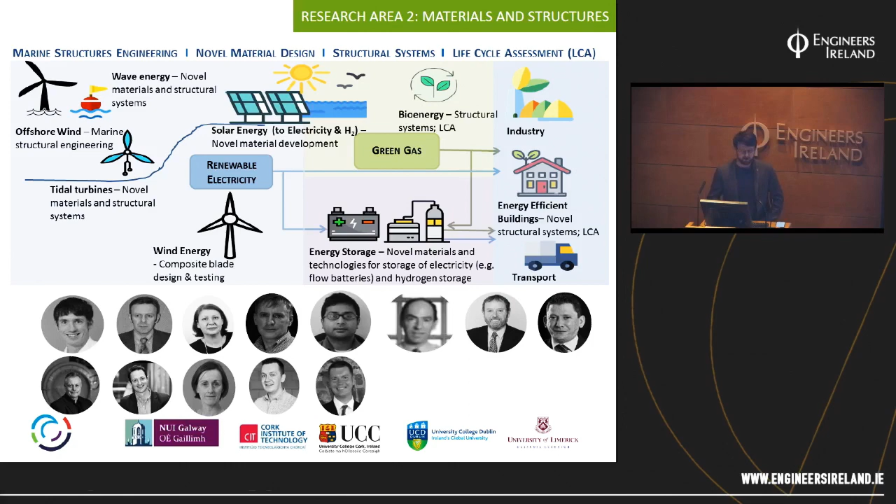Starting off with the energy generation side of things, but as the centre is developing, we're moving into topics that are closer and closer to the societal level and the actual application of energy throughout the full system. A lot of the research is collaborative across all the different institutions in Ireland.

I have a number of case studies here to talk through. The first one is some material characterization work done between NUI Galway and UCD, looking at how we can improve the mechanical performance and cost effectiveness of materials for applications that really haven't been tested before. Tidal turbines are devices that have to operate for up to 20 years with limited opportunity for maintenance in really harsh conditions.

These turbines operate 20, 30 or 40 meters down on the seafloor. You've got high pressures, and water ingress into the composite material is something that can happen and have a really negative effect on the structural performance. Some of the material characterization work done at NUIG involved developing a pressure pot where they artificially aged the composite material, put it in seawater at high pressure, and watched the voids or small holes in the composite material fill up with seawater.

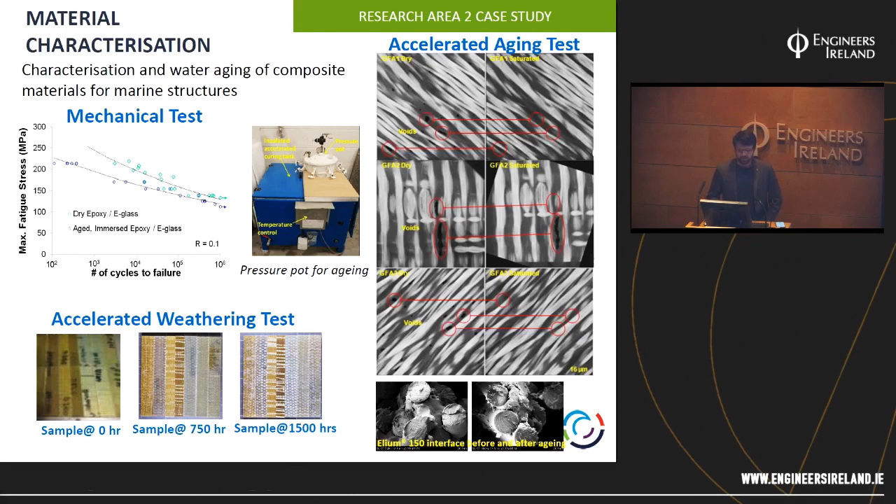They then did accelerated aging tests, including fatigue testing, to see how the material performed when simulated to have experienced 10, 15, 20 years of operation underwater.

As well as this, the part of the centre in UCD is looking at different types of materials, such as 3D printing and fiber reinforced composites for use in new applications such as tidal turbines. The example shown here is additive manufacturing as part of the SFI I-FORM Centre, led by Professor Denis Dowling in UCD, which involves 3D printing of fiber reinforced composites under different manufacturing conditions.

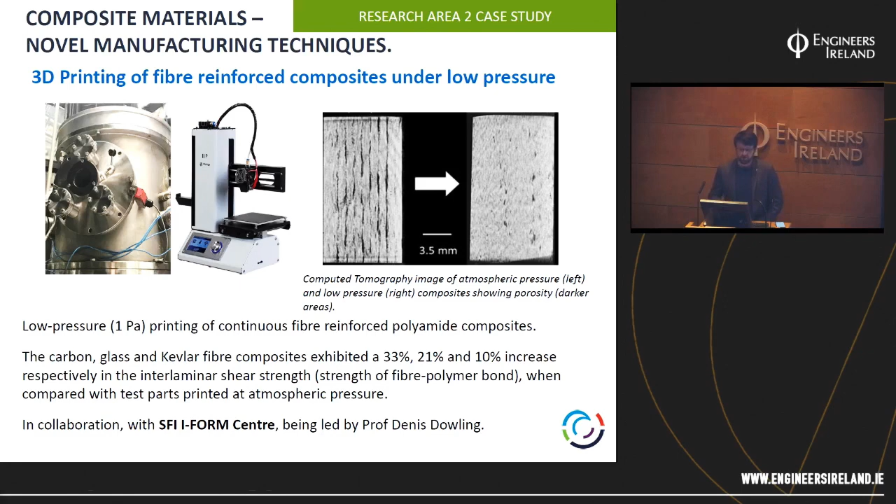The top right picture shows the difference in the quality of the composite at atmospheric pressure as well as under low pressure conditions. You can see there are much fewer voids between the layers of the composite, and therefore much better mechanical performance. This core materials-level research underpins some of the structural design and structural testing research that I was part of at NUI Galway.

Taking in the characterization of different composite materials, looking at coatings such as hydrophobic coatings for reducing the adhesion of water and therefore the erosion on surfaces, and the surface treatment work at UCD. It's all pulled together into coupon testing to look at how those materials behave mechanically, and then that feeds into our development of design and analysis software at the university.

I'll talk a little bit more about BladeComp and the development of the software in a little bit, but for now I'd like to talk about the large structures test cell that we have at the university.

This is a full-scale structural testing facility. We have a modular steel frame attached to, I think, a 10 by 4 meter or 10 by 6 meter reinforced concrete strong floor. So it's a modular setup.

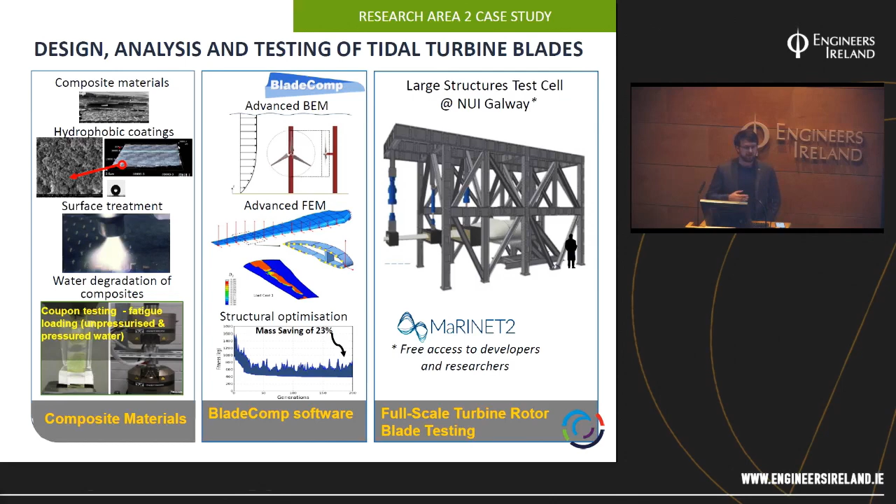We can change it around for the different types of tests or the different types of blades that we're testing. What we have here is a blade, 9 meters long, for a tidal turbine. So we have 3 hydraulic actuators attached to a hydraulic ring main, and they can go up to 750 kilonewtons of force. So we do structural, static, and fatigue testing of different blades.

On the design analysis side of things, as part of the research that we do and the services that we offer, we also do finite element analysis, assessments of the design of the structure, and analyze the model and the actual test setups as well.

Coming off the back of that and a couple of different research projects, we developed this automated design methodology. It takes in all the different input variables when you're looking at a blade - the geometry, the materials, the way the composite materials are laid up in a blade - and automatically generates these finite element models for different types of analysis.

What we do then is take those models, and the software can output the optimum design for manufacture. Working with ÉireComposites, a composites manufacturer based in Galway, we designed and built blades for 15 kilowatt wind turbines, just to test the whole methodology.

These were tested in the lab - you can kind of see it, it's a little bit small on the right. We did some mechanical testing of the blades to verify that the whole methodology and the software output accurate results. And we've done other physical testing, showing modeling and testing of 13 meter wind turbine blades as well.

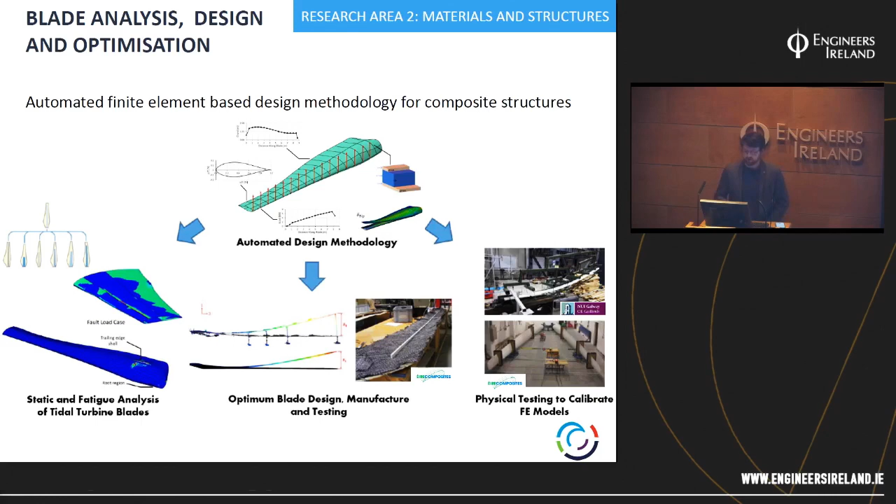One of the culminating points of this research was then a project, a Horizon 2020 funded project called FloTEC. That was working with Orbital Marine Power, a Scottish tidal turbine developer. They're building right now a 2 megawatt system.

You can see it at the top right. It's a floating structure with two 16 meter diameter rotors supported on it.

We used the BladeComp software to optimize the blade design for a number of different objectives. We were looking at making a lightweight, high performance, and cost effective to manufacture blade. Using genetic algorithms, we were able to generate thousands of different blade designs from the software, assess them all against one another, and come up with the best design to be manufactured.

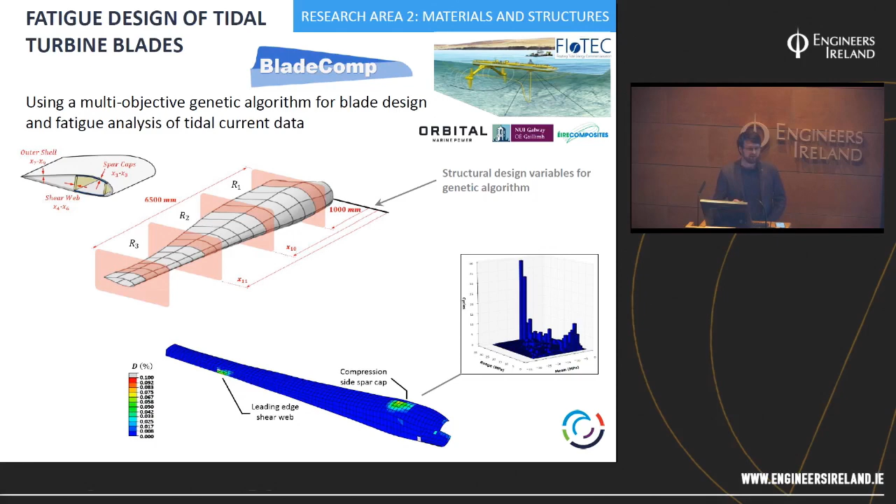So that project is ongoing. The blade is being manufactured at ÉireComposites right now, and I think testing is due to start in about June of this year. This gives us a bit of an overview of the technology development programs in tidal energy since 2011 and the inception of the lab at NUIG.

Initially, we worked with Marine Current Turbines. They were a Siemens-owned business at the time, but are now owned by Atlantis, or Simec Atlantis, in the UK. We developed a test specification for 8-meter long blades and acquired some of the hydraulic actuators for the initial testing.

Following up from that, we worked with Open Hydro to test blades for their turbine - I think they were half-scale blades. That led into projects with Orbital Marine Power that I've discussed, and ÉireComposites to test blades up to 13 meters in length. And in parallel with all this was the development of the design software.

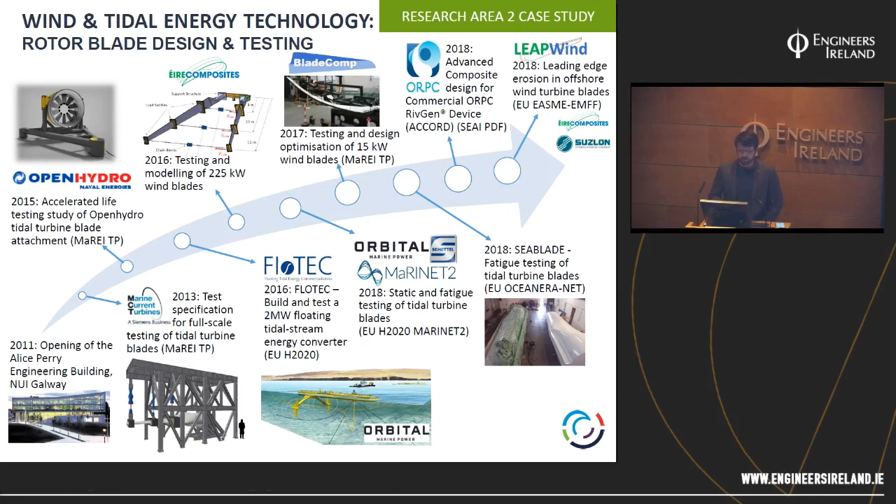James will talk about it in more detail, but we've also had projects working with ORPC to test blades for their turbine, continuing developments into wind energy, working with ÉireComposites and Suzlon, an Indian company that's the biggest wind turbine manufacturer in India.

We're looking at testing blades with leading edge erosion resistant structures as part of another project. So that's a summary of the work going on in NUIG. As part of the MaREI Centre, we don't just look at the initial design side.

We also look at operation and maintenance related research. One group, led by Vikram Pakrashi in UCD, has taken through the low to mid-level TRLs technology for underwater image processing of underwater steel structures. It's a system that takes images of different steel substructures and analyzes the levels of biofouling, which can increase the hydrodynamic drag on a structure. The system can define which types of biofouling are on a substructure and input them into finite element models to output the resultant drag, allowing analysis of the overall impact on structural lifetime.

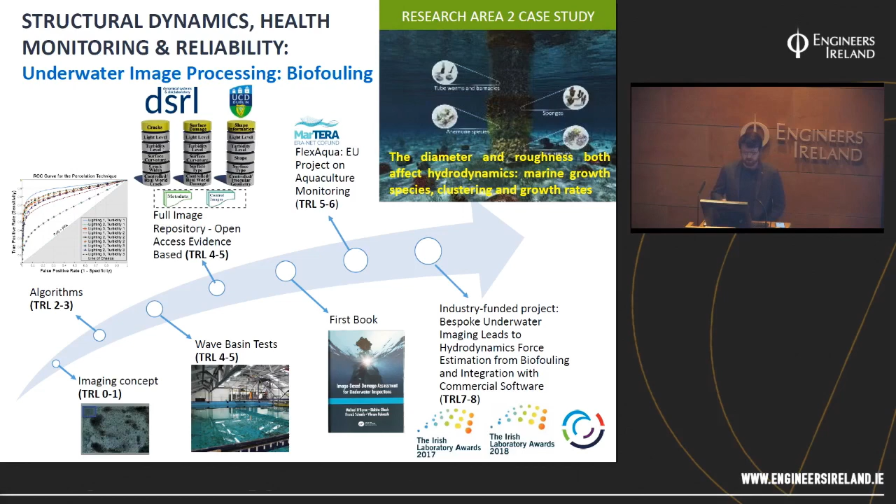That's an overview of the MaREI Centre side of the research. One thing that was a big player in the research ongoing at NUIG over the last couple of years is the MaRINET2 program, which is a Horizon 2020 funded research project.

It's based out of UCC, and the whole goal is the standardization of all the different testing requirements for ocean renewable energy devices. It also provides access to all the knowledge being generated in ocean renewable energy research, and provides access to different companies to cross borders within Europe and avail of testing not available in their home countries.

The transnational access part of the program allows energy developers or device developers to use facilities in another country to test their devices free of charge, supporting the industry. There are also work packages around developing an e-infrastructure for knowledge sharing and providing training to support the blue economy and create a highly trained workforce for this nascent industry.

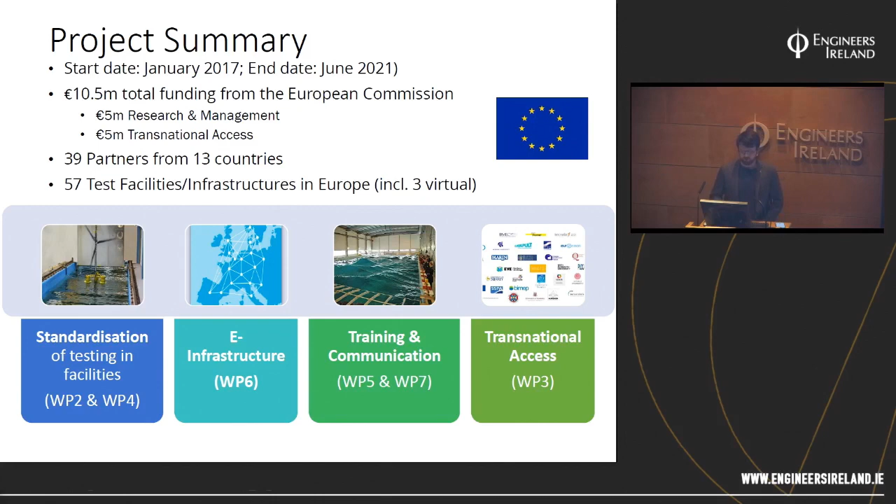The project started in 2017 and runs until 2021. This is the second MaRINET2 program, with 10.5 million total funding, 5 million of which goes towards transnational access, paying for companies to use test facilities around Europe. There are nearly 40 different companies participating from 13 different countries, organized into 7 work packages covering standardization, e-infrastructure, training, communication, and transnational access.

The team includes Michael O'Shea, who unfortunately couldn't be here today so passed his slides over to me, along with Jimmy Murphy and Emma Knowles, all based out of UCC. Some of the partners are listed here: EMEC, based out of Northern Scotland in Orkney, DTU in Denmark, and IFREMER, who we've worked closely with at NUIG on research programs.

Transnational access works through 5 different calls over the 3 years of the program. In the first call, a good chunk of the money was paid out, 1.26 million, followed by similar amounts in following calls, so there's still money left in the pot. If anyone here is a device developer or has contacts, they're welcome to put in a relatively short proposal for the 5th call coming up later this year. There will be information as part of a webinar and FAQs on the application process, and every institution has an infrastructure manager who can walk you through it.

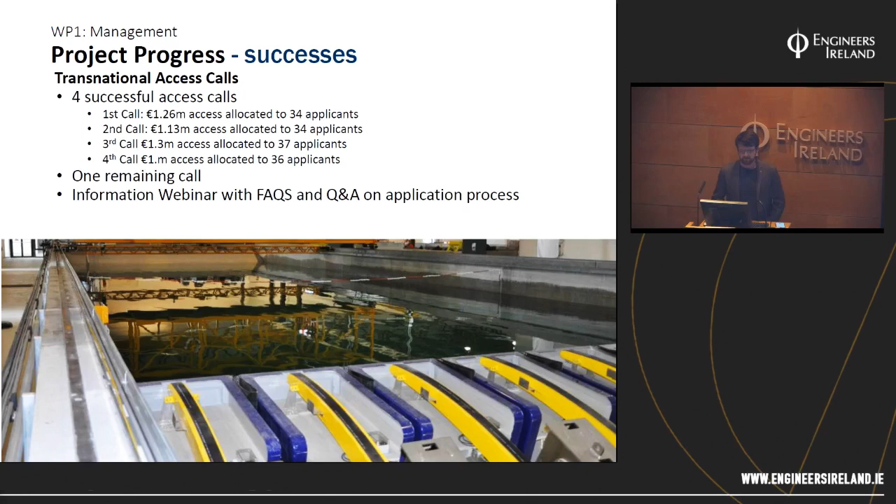Some statistics for Ireland so far are really quite good compared to other participants. Nearly all applications to Irish institutions have passed, mostly on the first call with some on succeeding calls, with a total of over 300,000 in funding that's gone towards Irish developers and researchers over the first 3 calls.

There's also a research project coordinated by UCC called the Tidal Turbine Roundrobin, which aims to standardize all the different test facilities, the wave flumes or flow tanks, across 5 different countries and 5 different test infrastructures.

One tidal turbine has been developed, about 1/10 scale, roughly a 2-meter diameter, and it's being tested at each of the institutions. Up to June 2019, the turbine was tested in France, Scotland, and another country where CNR is based, and it's soon to be tested at Strathclyde and Queens. The results will be published as a comparison to help develop a testing standard for these devices.

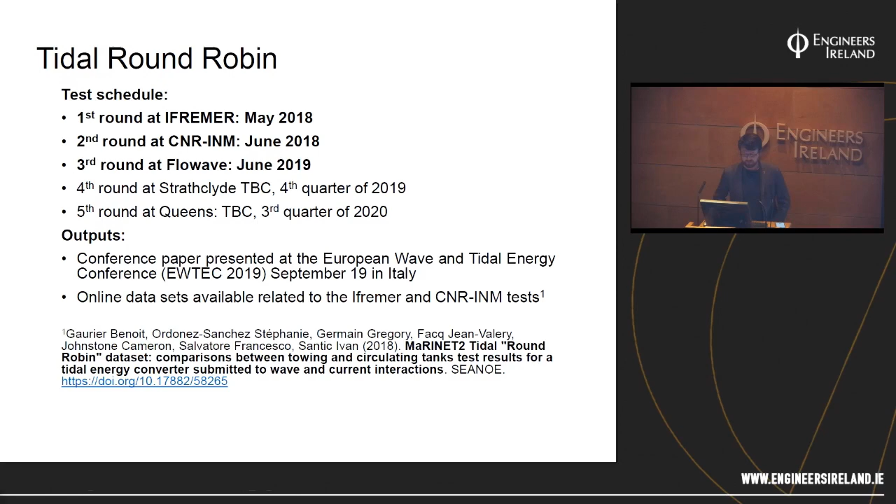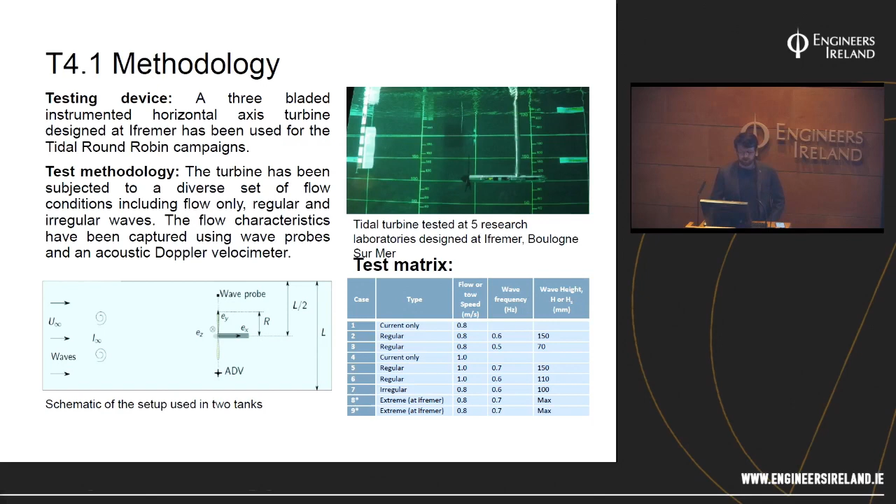The methodology involves a 3-bladed horizontal axis tidal turbine. The test setup shown is at IFREMER in Boulogne-sur-Mer, France, where it's subjected to a number of different flow conditions representative of regular and irregular waves, using the same acoustic Doppler velocimetry instrumentation to monitor the device across all the different infrastructures.

One of the big successes of the project is the development of a virtual access database. After each developer tests at an infrastructure, they produce a report that goes onto this virtual database, fully accessible to researchers and developers around the world, in line with the European Commission's ideas around open research and development for publicly funded research.

One last image of a successful project: Schottel Hydro, a company based in Germany. They have roughly a 6-meter diameter turbine being installed in the Bay of Fundy in Canada, and they were successful in the Transnational Access Call 3 as well as Call 4 to do static and fatigue testing at our facility in Galway. So I thought we'd get one last little plug in.

And right, that's it. Thanks very much.

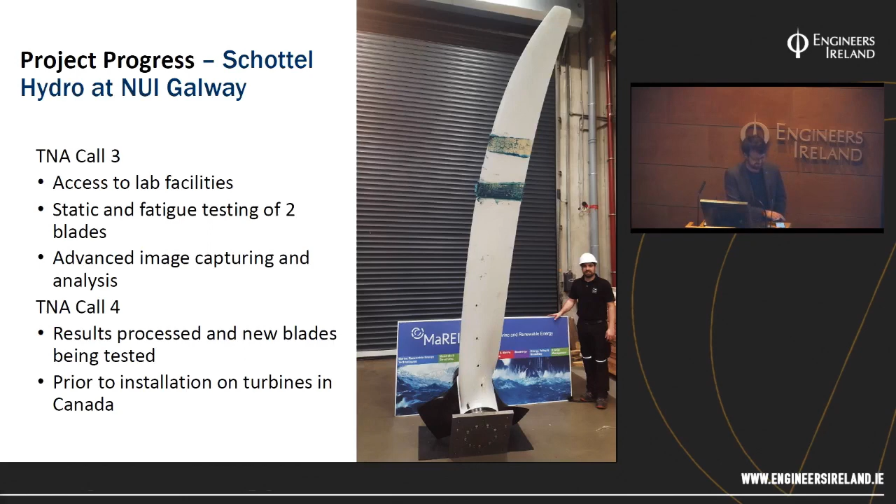Some background on ORPC: we're a US company headquartered in Portland, Maine, about 2 hours north of Boston. We were founded in 2004, and we have about 30 employees, most located in the US. We also have offices in Quebec, Canada, and in Dublin, Ireland. To date, we've raised over €73 million, split roughly 50-50 between private investment and federal and state government grants in the US and Ireland. We're the only company in the world to have delivered power to a grid from both tidal and river marine energy projects.

So I figured I'd start tonight by going back to basics, since we usually talk to people in the tidal energy community, and explain why it is an industry in the first place. As it's Engineers Ireland, I had to put in some formulas. This is the formula for how much power you can extract from a turbine in open flow—the same formula wind turbine developers use to design their turbines. Tidal and river energy is essentially underwater wind turbines.

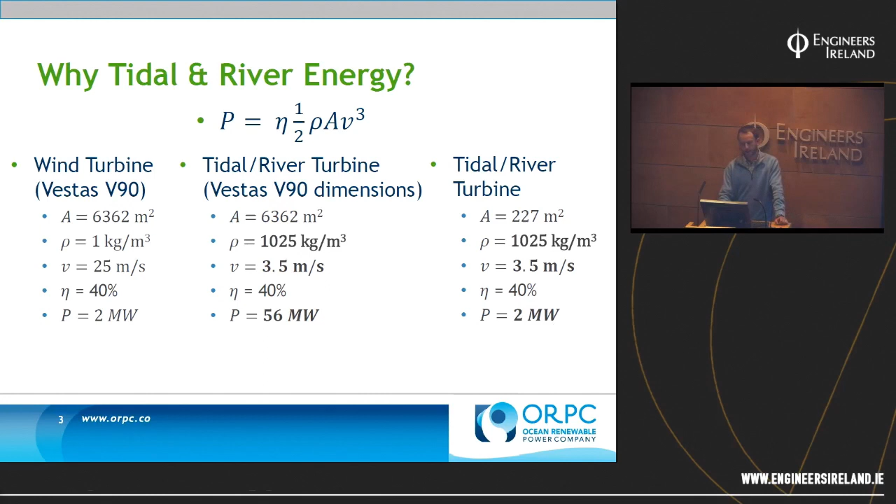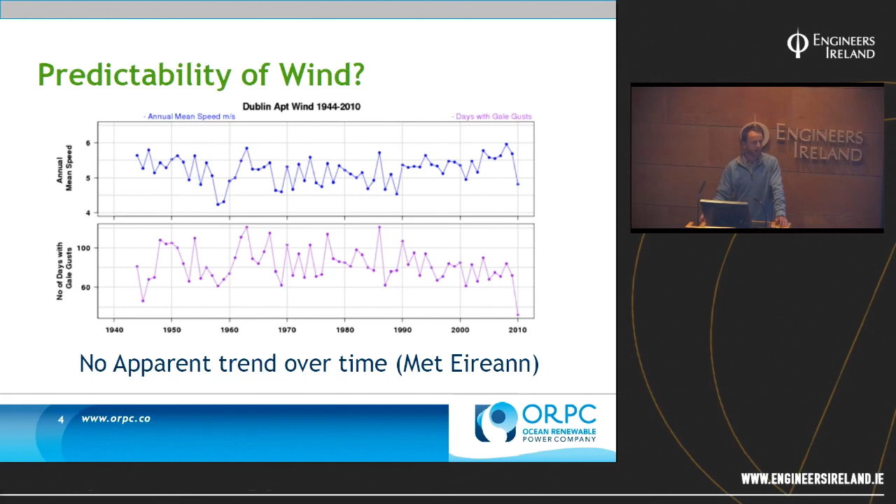That's one big reason why tidal energy is definitely going to be part of the future of renewable energy. Another reason is, if we look at the past 60-70 years of wind data in Dublin Airport, there's no real trend you can pull out of it. It's purely weather based. We can't tell you how much wind is going to be produced, so there's no real way of knowing what the impact to the national grid or utility grid is going to be from a wind site.

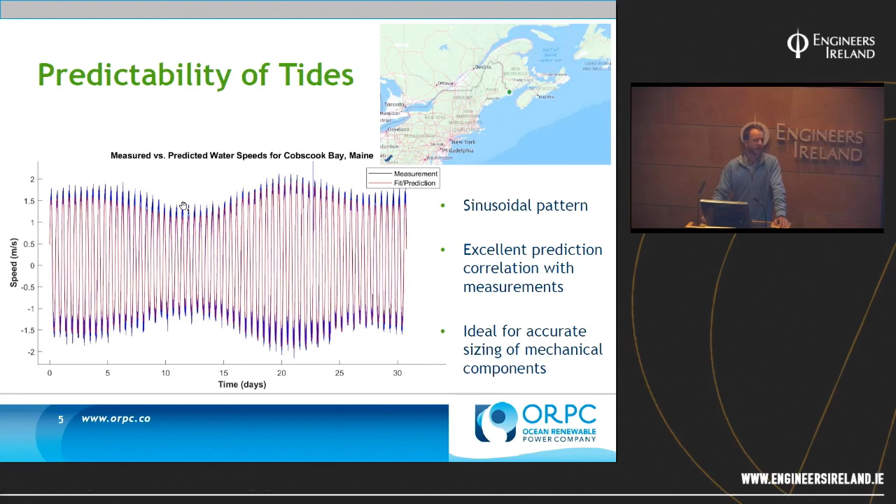That's the opposite with tides. One of our sites in Eastport, Maine, where we deployed a system in 2012 - it's the green dot here, right on the border of the US and Canada. These are measurements taken over a 30-day window, back in 2013 just after the system was installed. You can see it's a purely sinusoidal pattern, with peaks and flows based on the lunar pattern for each month - peaks and troughs of the waveform, but ultimately it's entirely predictable. These are measurements we took from that site in blue, and our predicted water speeds in red.

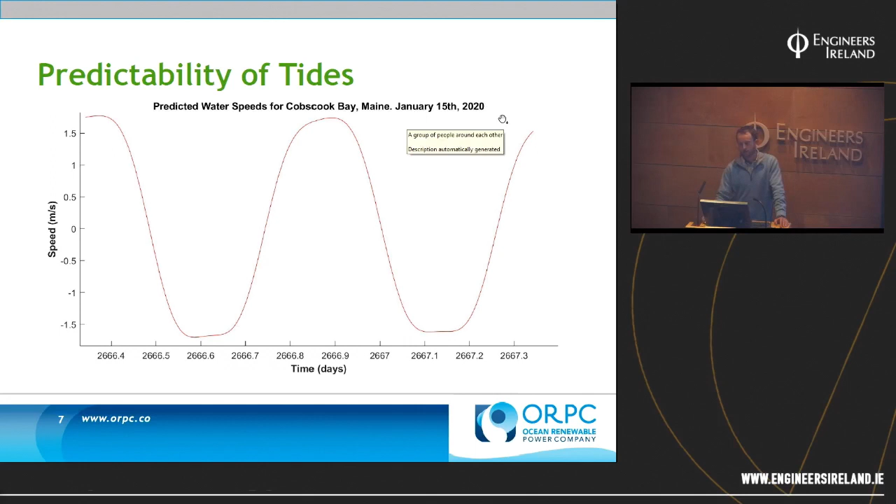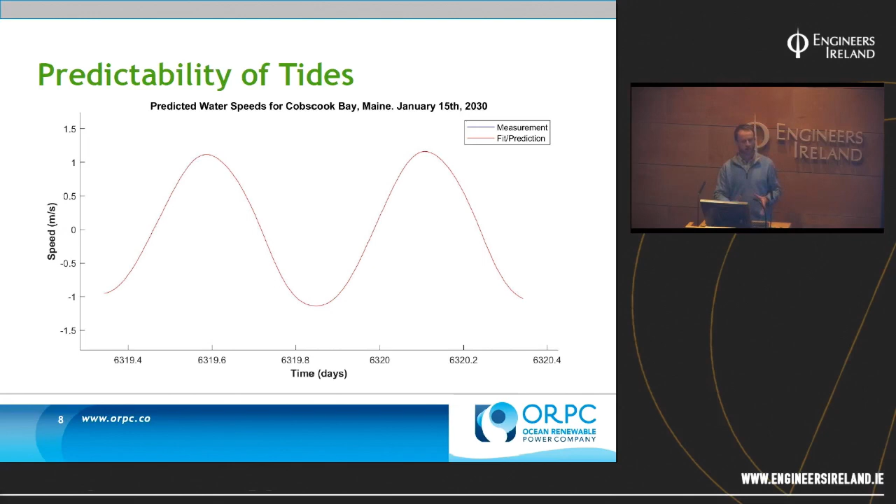They're pretty bang on the money - so much so that we can tell you, today, January 15, 2020, these are the speeds at that site. This is not from measurements - we have a MATLAB program which outputs it for us. We can tell you in 10 years' time what the water speeds are going to be at that site. That's the kind of impact tidal energy can make - we can be a base load energy source for utility grids because of how predictable the energy source is.

We've installed 12 projects since 2004. The first grid-connected one was in 2012, the TidGen system. ORPC developed a modular turbine design where we have a single turbine size, and if we want more power, we just attach more turbines to that driveline. We chose this cross-flow turbine design, like an old-fashioned lawnmower, as opposed to more conventional wind turbines, because we can access more sites this way - it has a much lower profile, so we're able to sit in lower depth sites which a more conventional turbine would not be able to fit.

So this is the TidGen system, which was grid connected in 2012, and there were some flaws with this system in the foundation. We had a piled foundation, 10 piles drilled into the seafloor - that was a very expensive undertaking. Ultimately we're trying to make a commercial product, so with every deployment we're learning new ways to reduce cost and improve efficiency.

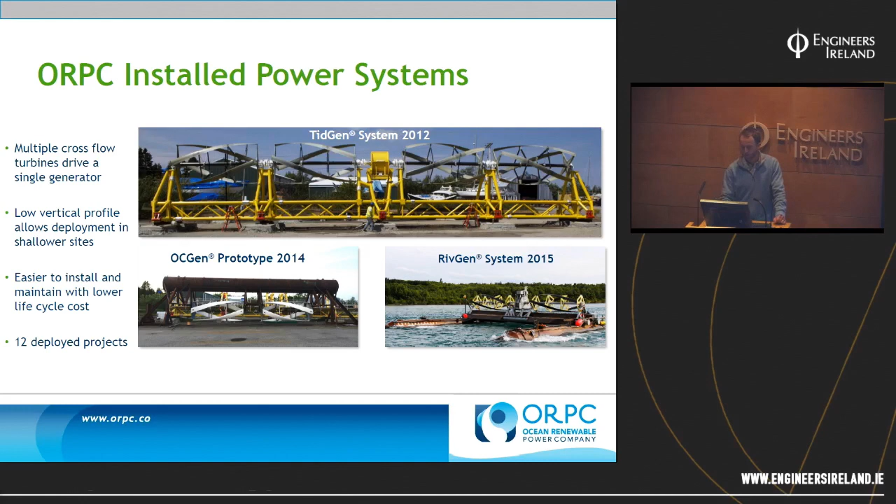This is the commercial RivGen system, which was installed in the summer of last year. It's rated for 35 kilowatts at 2.25 meters per second, which is the nominal water speed we try to base all our sites off, but it's capable of operating up to 80 kilowatts at 3.5 meters per second sites, which is the maximum power the system is designed for.

The idea behind this system is to go to remote communities to offset the cost of diesel energy. In northern Canada, Alaska, and many places in the Arctic, there are thousands of remote communities which fly in diesel by plane to operate diesel generators incredibly inefficiently, because they're not connected to a national grid.

So they're paying electricity prices of about €1 a kilowatt hour, whereas in Ireland we're paying 15 cents a kilowatt hour. Some places in the States you're paying 9 cents a kilowatt hour. So they're paying over 10 times what people on a national utility grid are paying.

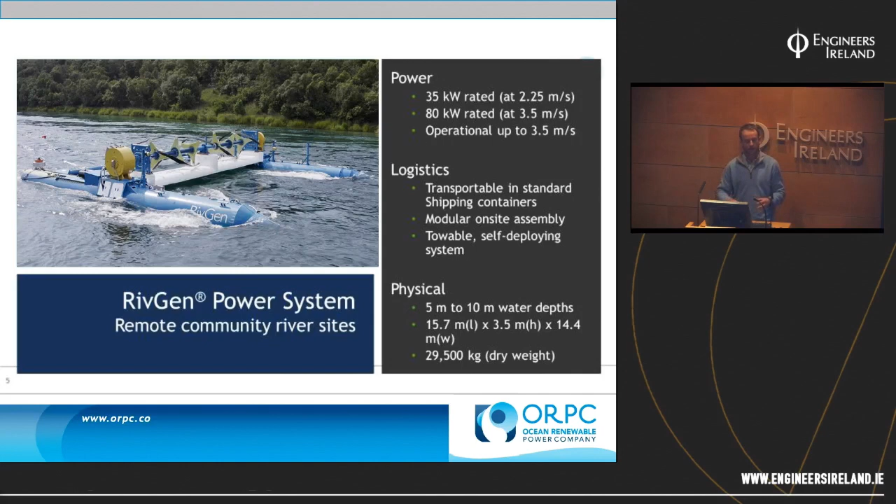Because tidal and river energy technologies are still in their infancy, this is an area for a developer where we can develop and manufacture systems and sell them to gain knowledge, improve the efficiency of the system, and eventually drive down costs.

This is the next generation tidal system, again designed for remote community tidal sites. This operates up to 350 kilowatts, and it's the same floating buoyancy pod design that I was speaking about earlier.

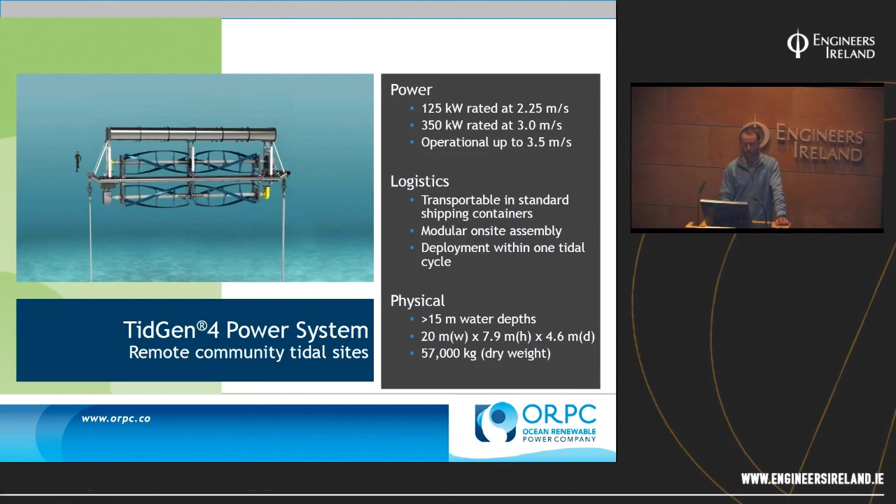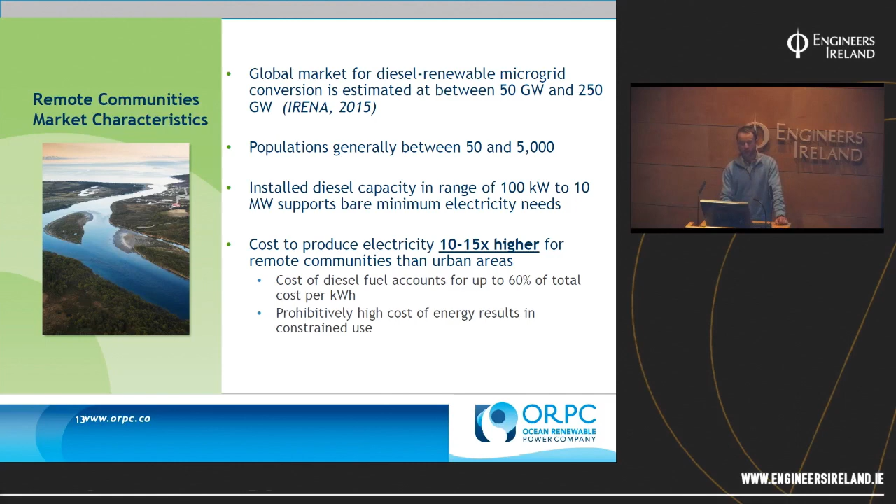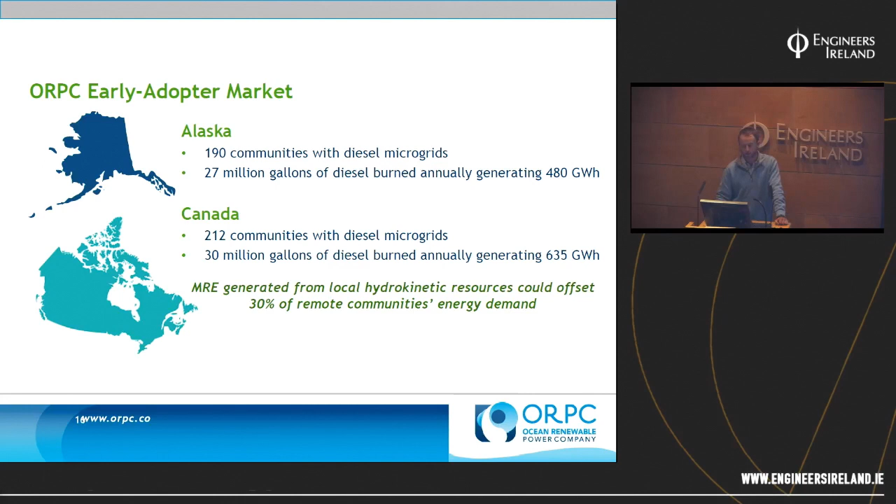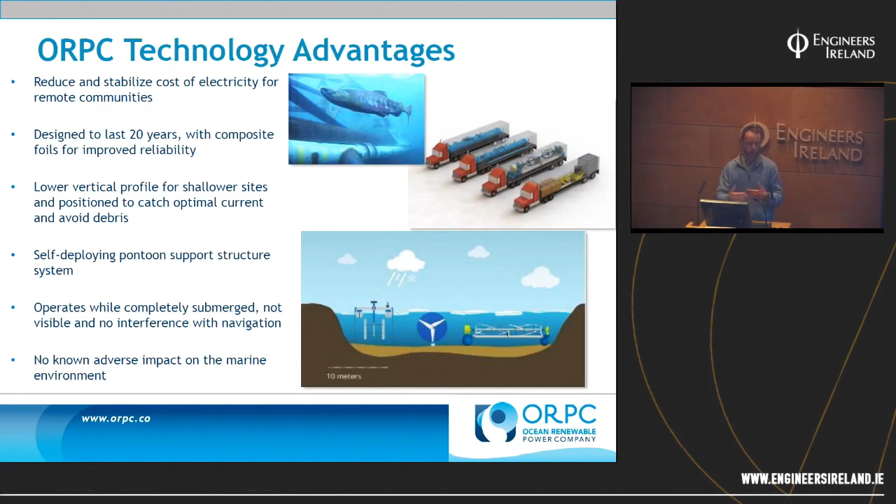We've kitted the turbines out with cameras and Doppler sensors, and essentially the salmon want to swim in the slowest parts of the river because they're swimming upstream — it's easier for them. Also, when the turbine is operating, it creates a pressure wall in the channel. The same way a fish isn't going to swim into a wall, it senses a pressure boundary upstream and simply swims around the turbine.

So why is marine renewable energy not mainstream? Because I've just been talking about how great it is, and it all comes down to cost, basically.

The levelized cost of energy is the metric these technologies are based on - how much it costs to generate a kilowatt hour of energy. This is still higher than our baseline target, which is to be a competitor for offshore wind, and we have high capex costs.

That's due to economies of scale, basically, because we're a new industry. We've a handful of installations as opposed to installing farms where we can put in an order for 100 turbines. It's one-off systems that we're installing.

We also have high operational costs because if something were to go wrong in the gearbox of a wind turbine, you send up a technician, which takes half an hour, and they can have a look. Whereas these systems are installed underwater, and we've designed them to operate for 20-year lifetimes, but there's a lack of extended operational runtime. So there's no way of knowing whether, even though it's been designed for 20 years, it's capable of doing that. That lack of runtime essentially increases our operational costs.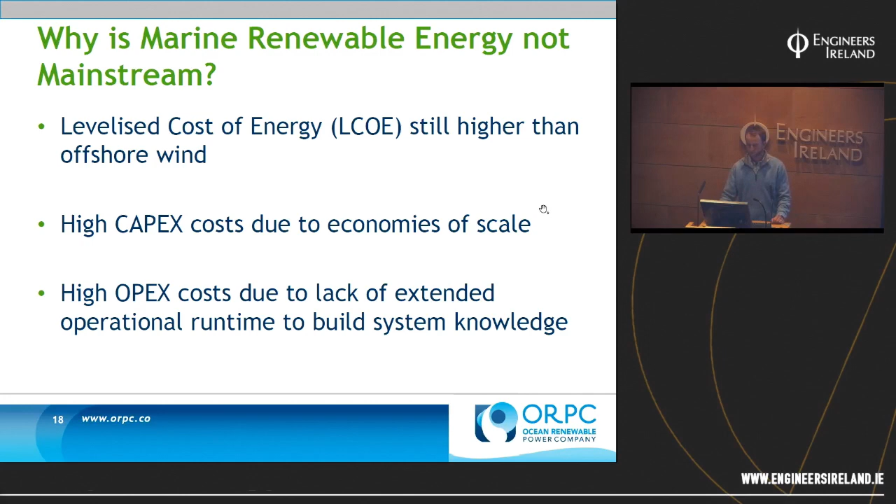So why we're here tonight is Tidal Energy Technology in Ireland. So why does ORPC, a US company, have an office in Ireland? A big reason is, if you're a tidal energy company, you need to have a presence in Europe, because this is where a majority of the tidal resource is in the world.

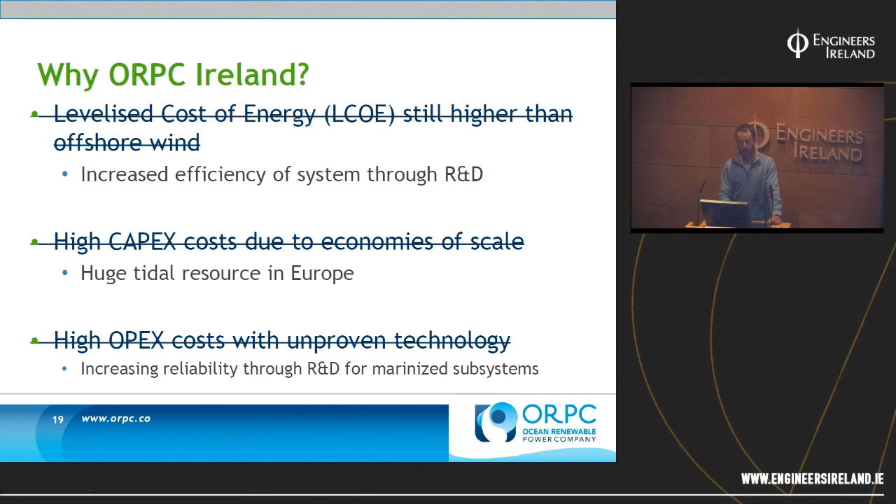Also, Europe has very friendly government schemes to help foster companies like ourselves through technology development, which isn't necessarily the same in other countries, which is why it's also been beneficial to operate in Europe.

So ORPC Ireland, we set up the company in 2015. I was previously working with the company in the US, doing a lot of field work, and then moved back home in 2015.

We've been successful in getting some funding from the Sustainable Energy Authority of Ireland, as well as the European Commission. So far we've had 4 projects here, ranging from smaller scale resource assessment work in Donegal to see what the tidal resource is there, up to large scale R&D efforts to develop new turbine and generator technologies. Those have been funded through Horizon 2020, Ocean Renewable, and SEAI as well.

Some of our research partners - we work a lot with UCC, Letterkenny Institute of Technology, as well as Fraunhofer Research Institute in Germany. Some of our industry partners include EireComposites, who Ed mentioned, they're our manufacturer for our turbines, which was a new relationship we built since opening the office in Ireland. We also have IKM Electro, who are developers of our generator, Black & Veatch, who've done some resource assessment for us, SKF, and Sustainable Marine Energy.

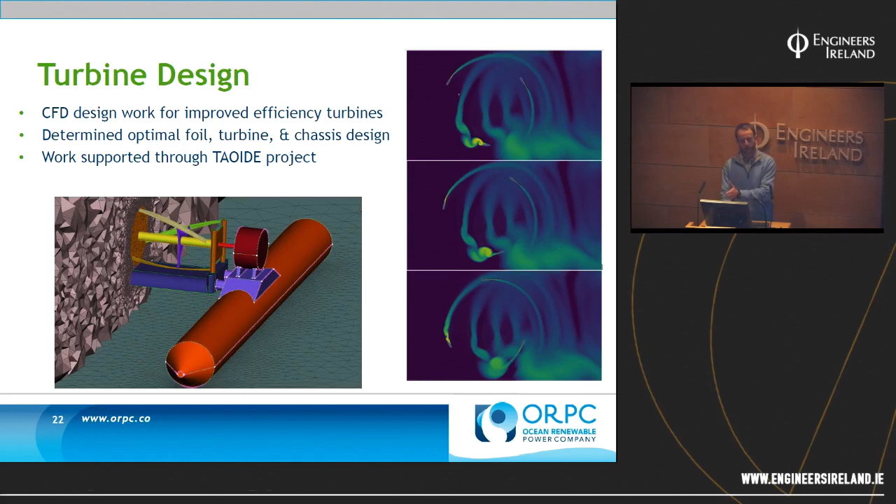Turbine manufacturing - I mentioned that we work with EireComposites in Galway. They manufactured our turbines for the RivGen system, which is now installed in Alaska. This is the system here just before it was shipped out last May.

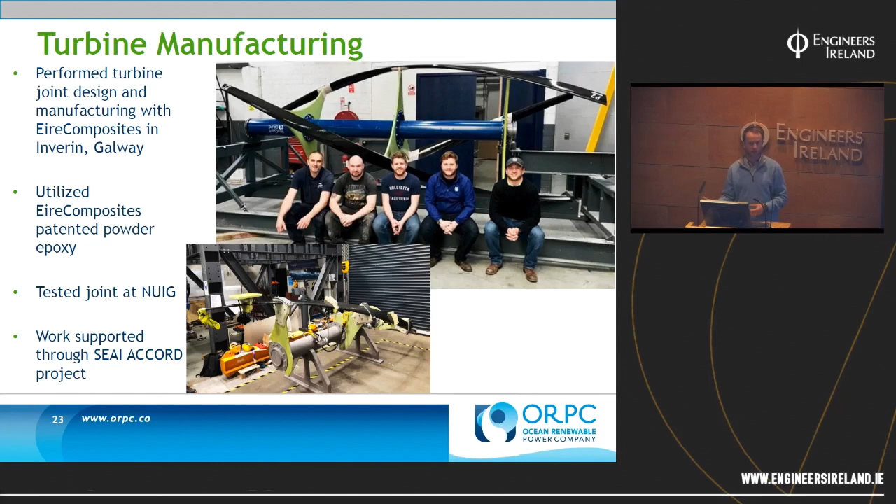And then the test facility at NUIG that Ed mentioned, we're currently testing a new joint design at that facility. One of the negatives about when this system is actually operating is that it's difficult to get actual operational data from the foil, like stresses, strains and forces acting on the foil, back to our SCADA system because it's a rotating system. So this is a way of us verifying our FEA analysis and design work through an actual lab setting, where we're able to input the same loads that we will see based on our CFD analysis, and see how it affects the turbine and the joints.

And then I also mentioned that this is where we're doing our generator design and manufacturing. We work with IKM Electro in Norway, and one of our learning lessons through many installations has been: you need to make the system that's underwater as stupid as possible, because if you put stuff underwater it's asking to be broken, so everything needs to be very simple. That's why we use a permanent magnet generator.

We don't have any gearbox, and through this Horizon 2020 funded project TAOIDE, we're designing and testing a fully encapsulated generator. So instead of having an exposed stator and rotor, which if seawater were to leak into the generator would completely catastrophically destroy it so it can't be used further, this system is designed for seawater in the air gap as a normal operating case.

As well as that, we've designed a cantilevered bearing design, so we've reduced the number of bearings from 2 down to 1. We're constantly trying to reduce the amount of failure points underwater, because these systems are designed for as minimal maintenance as possible and for operation up to 20 years.

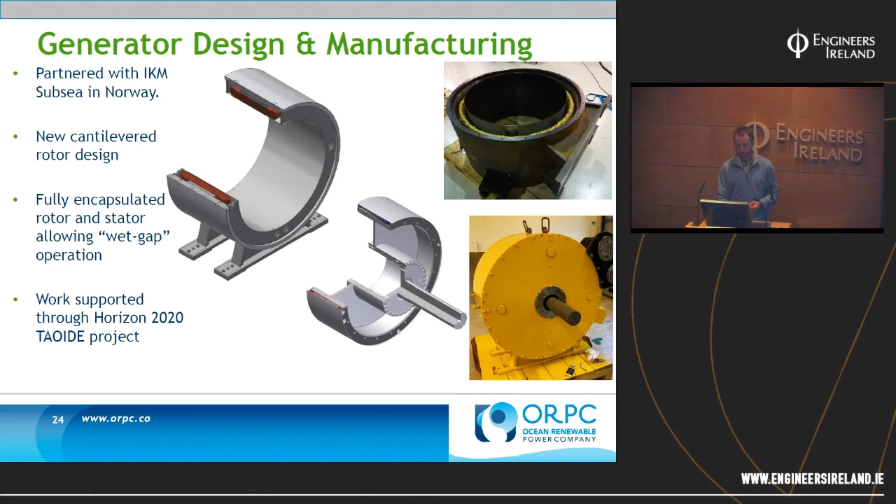Did you talk about how the tidal ocean turbines are anchored?

I didn't. For our tidal system, it depends on the geotechnical data for each site. But what we've installed in the past has been pile-driven anchors, and we've also used gravity-based anchors. We're looking at rock pile anchors at the moment as well. We're working with Sustainable Marine Energy based in Scotland to develop a rock anchor design for our system.

It varies between the different companies in the approach taken. The company we're working with right now, Sustainable Marine Energy, have a floating platform and tension leg connections down to the seabed - I think it's probably piles to connect the tension leg down at each point. But it varies company to company and what approach they go for.

You mentioned extractable tidal energy and why Europe, particularly the UK, has so much. What gives the coastline extractable tidal energy? Essentially, you have a huge body of water in the Atlantic Ocean, and for each tidal cycle, when you have high tide and low tide, the water has to come from somewhere. The Bay of Fundy, which is the channel of water between the US and Nova Scotia, has some of the biggest tides in the world because the whole Atlantic is being funneled through that channel.

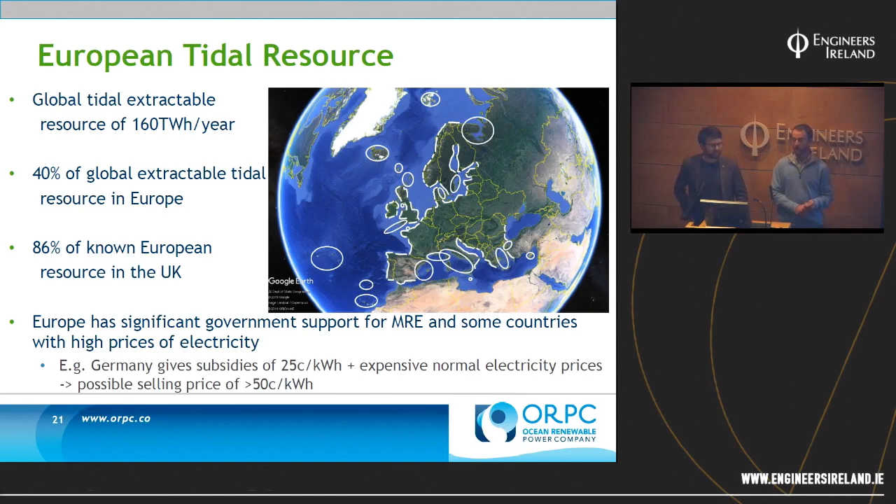Yeah, so there's some schemes that governments have, I mentioned it back here. So the German government gives subsidies for marine renewable energy. It's not the greatest country in the world for tidal power, it doesn't have much of a coastline. But it does give subsidies of 25 cents per kilowatt hour, and it has relatively high electricity prices. So if we were to install a system there, we'd be able to sell that power for 50 cents a kilowatt hour, which is actually right about where our LCOE is anyway. Whereas if we were to go to a country without that kind of subsidies, it's not really competitive with the other generation that's on the grid.

Do you know how much percentage of Ireland is provided from tidal energy? There is no grid-connected tidal system in Ireland. In Northern Ireland, in Strangford Lough, there was the marine current turbines. They had a turbine installed there from 2008 until maybe 2016. It was a test device though, so it was grid connected, but it was mostly used just to test their system and their operation and all the rest. So it wasn't really supplying electricity onto the Irish network.

The one big source of funding that's just been announced recently was through the Interregional Development Fund, a European industry funding program. I think it's 23 million. Do you know the Tiger program? I do not know. Okay, right. Yeah, something like 23 million is funding a consortium of companies looking to develop tidal energy. So it's not just developers, it's supply chain companies too. The idea is that it helps build up an industry and a greater supply chain, so that one or two developers benefit and all the other developers then benefit from it. So there's more funding going into it now than even a few years ago. And the goal is to have a European-based tidal energy industry in the next 10 or 20 years.